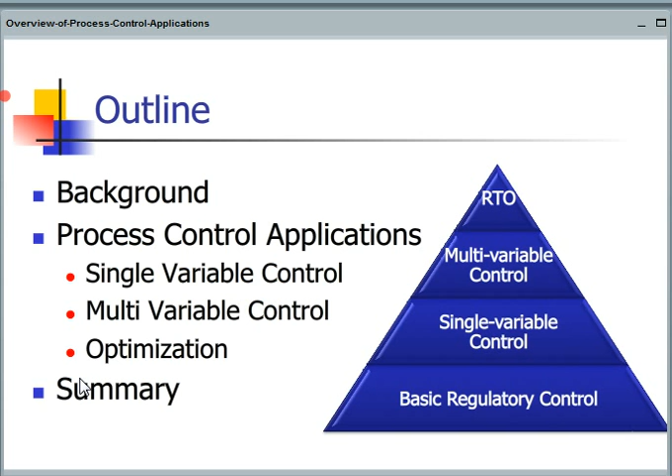We'll move on to the next one. So are you ready for some advanced process control? It appears that the job of a process control engineer will be very cool - you're working with applications all the time, and you can watch football on the side, as the cartoon shows. But it's also really a very critical job in the plant. You have to concentrate because any mistake you make can be dangerous and critical to the safe operation of the unit.

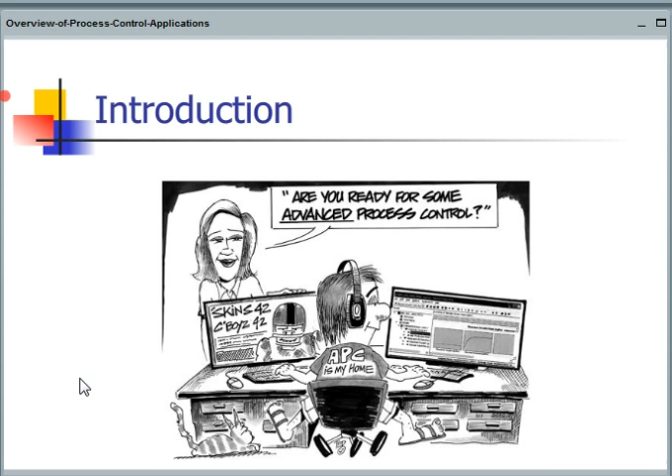So we'll just go into a little bit of background on how process control applications started. In the 1950s it was all manual control, meaning somebody would look at the sensors and see the reading, then manually change the valve, as shown in this cartoon here. You see the man in the cartoon is smiling, but that's not usually the case - it's a very hot and difficult place to work, and operators don't appreciate having to go out and manually move the valves. Imagine there are hundreds, if not thousands, of process control loops out there, and if for every loop there's an operator that needs to be looking at it, that's not very safe.

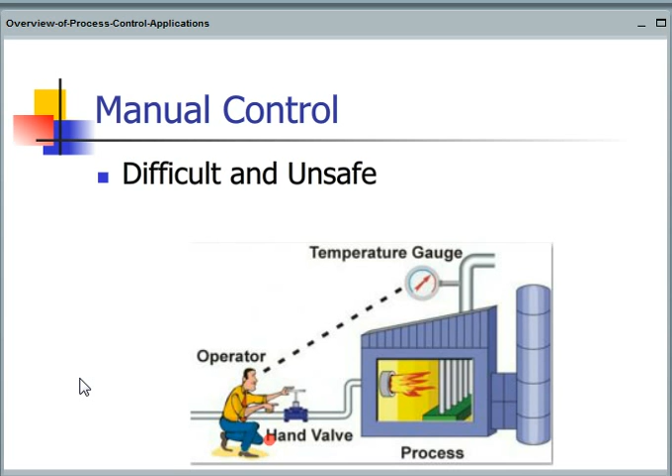So manual control typically led to the development of more automated control schemes. Over time, we can see the number of fatal injuries and how they have trended over the last couple of decades. This graph was put forth by OSHA, which stands for Occupational Safety and Health Administration, and it put in place regulations and controls to reduce workplace injuries. Over time, the number of fatal injuries has gone down considerably. Now, for each fatal injury, there are many more minor injuries that happen inside a plant. So you can see that due to the regulations and controls that have been put in place, the number of injuries has gone down over the years. That's the value of process control to an operational unit.

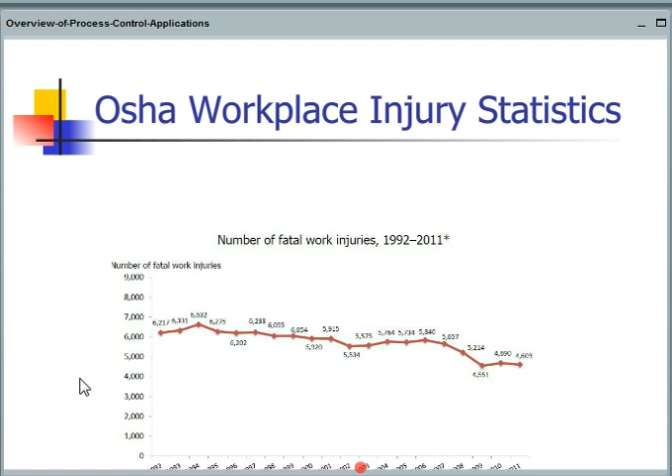So how did the transition from manual control to automatic control happen over the years? There were many developments, and one of the primary ones was in the field of instrumentation, where instruments were able to make readings accurately as well as send them to the distributed control network for the auto controls. The other important development was the control element, which is usually a valve. The change was from a manually controlled valve to a pneumatic, automatic, or motor-driven control valve. Here in the picture below, I'm showing a pneumatic control valve - it uses air pressure to move a diaphragm that controls the opening of the valve.

What this allowed us to do is remotely control the flow through different units as well as implement more complex control schemes. So we have a controller, we will talk about it a little more. User interface, how operators view the controller, is very important. If they don't really understand, then the controller is not very useful. And so are the work processes, meaning when operators use a particular control scheme, when they turn it off, and there are guidelines for them to

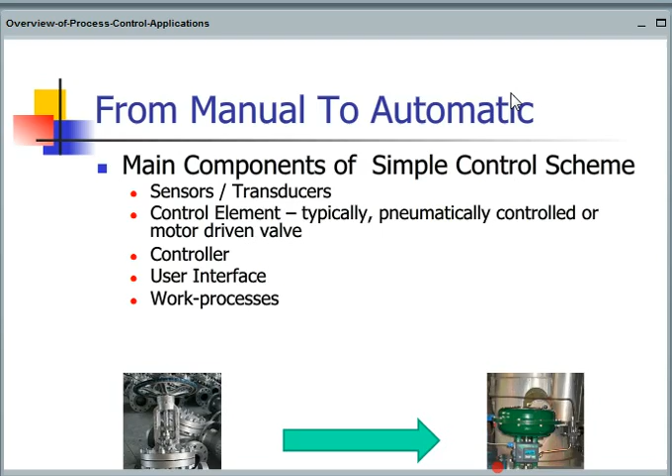properly use a controller, and that's what is very critical for the operation or success of a control scheme. So what are the key considerations you have to take into account building a control scheme? First of all, as we talked about, safety. Safe operation is critical, you want to build a control which is safe. Nowadays, people are very conscious about environmental emissions from refineries and chemical plants too, and you want to make sure you meet

all the set controls or the limits for the emissions. So you want a controller that is easy to operate for the operators. If it's very tedious, they're likely not to use it, so you want a very easy to operate controller. Sometimes the controllers are designed to meet the product specs, and they can also be used for improving the profitability of a unit.

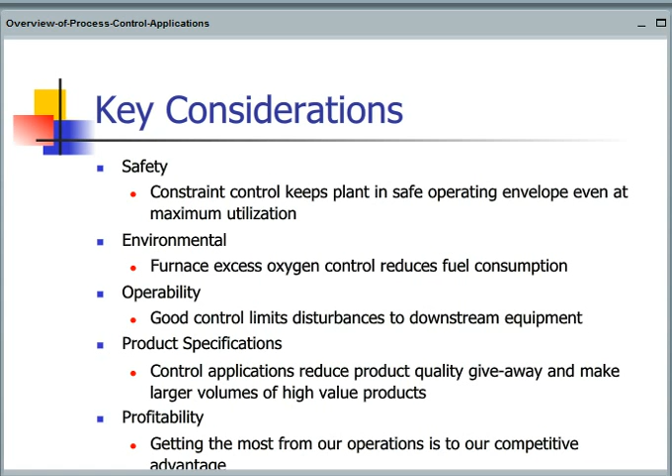We'll talk about single variable control. But before I go into single variable control, there's a layer beneath that: the basic regulatory controls. These are out in the field, close to the process, and are usually temperature, pressure, or flow control loops. When you set a set point for a flow control, this basic controller achieves the set point and keeps the flow at the value you want. These basic control loops are the base of the pyramid. If the instrumentation in a refinery is not good and the basic controllers are not working properly, all bets are off. All other

success of any other advanced control scheme depends on how well these basic controllers perform, so it's very essential to have good instrumentation. From my experience in the chemical industry, many refineries were built long ago, in the 1950s or 60s, and don't have proper instrumentation. As a result, it's very difficult to implement advanced control schemes with poor instrumentation. So the first thing when we go into a project is to tell the refineries about the instrumentation issues. Once you fix the instrumentation issues and have basic regulatory controllers working properly, now you can do a little bit of advanced stuff, which includes single variable control.

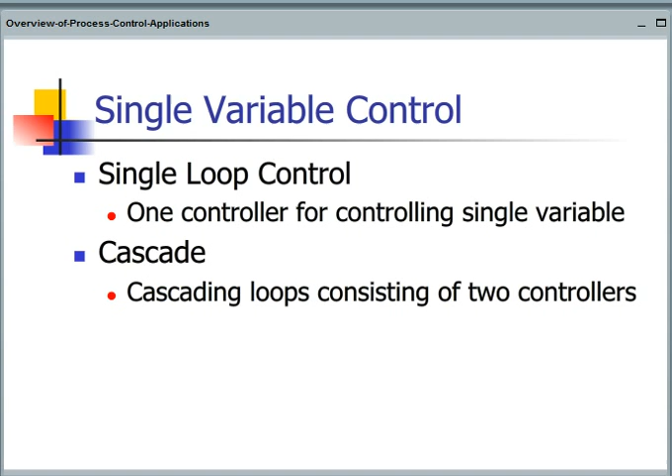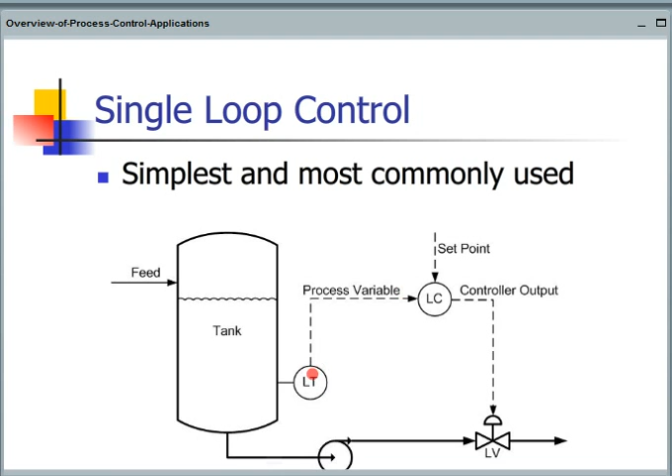To give a representation of a single control loop, here we're trying to control the level of a tank using the bottom valve. All the controller is doing is getting the level from the sensor and then setting a set point for the valve. Very simple control scheme. It looks like it needs instrumentation to provide this set point, and also the level sensor, as well as the controller design.

There are many applications of single loop control, and one of the primary applications you'll see a lot in a refining or chemical plant is surge tank control, or level control in general. What's the importance of a feed surge tank level control? It's the level of the tank that feeds the unit.

If this controller doesn't work properly, the feed to the unit starts swinging and you never have stable operations. The operators get mad at you if they find the controller is not working and causing them more headaches in operation. Tower bottoms level control is critical because if the bottom level goes high, it leads to flooding.

If it goes too low, then the trays are getting drier. Either situation is not very good. So if the instrumentation or the level reading goes out of the operator's view for some instrumentation or wiring reason, an operator needs to go out and check what the actual level is, and tell the operator on the board to make the necessary corrections to control it, because it's one of the critical levels in the unit. Sometimes when the level goes out for an extended time, it may lead to a shutdown of the entire unit.

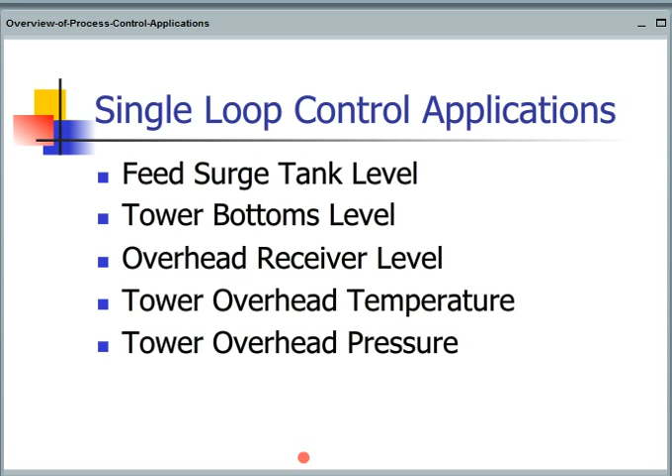Tower overhead temperature controllers are usually used for determining the efficiency of the distillation. Essentially, what you do using this temperature is set the cut point for the overhead stream, and it's again critical to meeting the product specs. And so is the tower overhead pressure control.

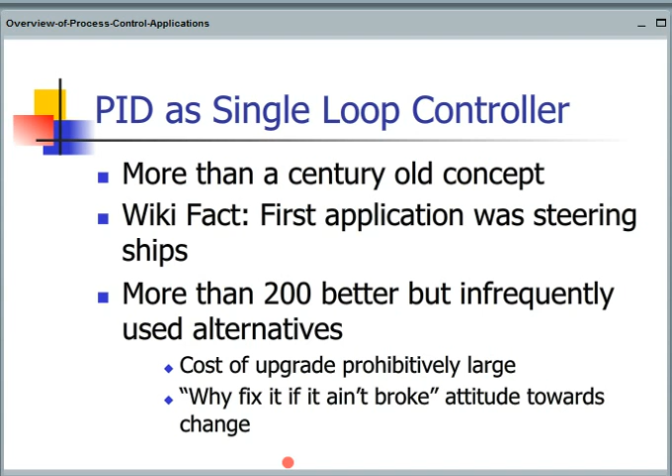Cascade control loop has two controllers, and there are actually two loops, the primary and the secondary loop.

The reason we use the cascade structure is that we do not want the disturbances in the secondary loop to affect the control variable in the primary loop.

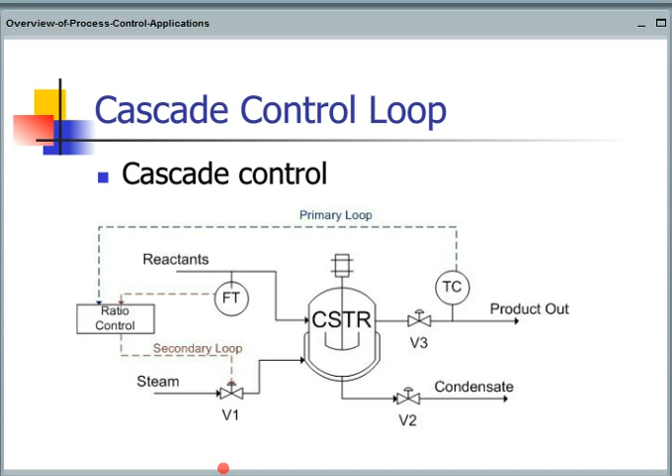Now, where this is useful in the chemical industry is for furnace control, especially in the refining industry. A furnace is like a gas stove, but only about 1,000 times bigger.

It uses fuel gas to heat up the process fluids that pass through it, and it's a tall structure. You can identify a furnace from a distance usually.

The main objective here is to maintain proper rate of heat energy to the charge. You set the...

...temperature, coil outlet temperature for the process fluid, and you change the fuel gas that's been provided to achieve that temperature. So it's a kind of cascade control loop that we use.

One of the other main objectives is to maintain proper air to fuel ratio. If the air to fuel ratio goes low and you have a lot of fuel gas in your furnace, then it's a dangerous situation.

Your furnace starts shaking. This situation is called flooding, and the entire furnace has become a bomb which has fuel gas in it.

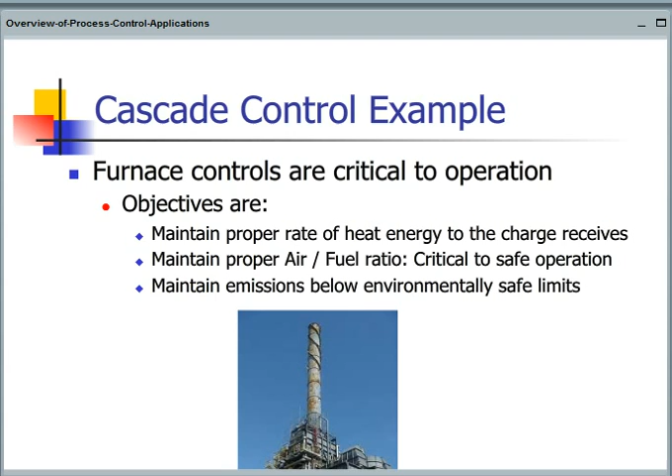There are some very well-known limitations of the basic controllers. One of the main limitations is that if you want to do multi-loop control for controlling many variables at the same time, you would have issues with the complex structures that you build.

So implementing those complex structures will be very difficult because the instrumentation or the DCS system may not support it.

It is also well known that the interactions between two or more controllers can quickly cause a drop in efficiency of the control scheme. As we have learned in our undergraduate course, if there are two or more controllers...

...and if the relative gain is high, then it's very difficult to control those two loops independently.

Basic controllers do not do a real good job if there are time delays or non-linearities in the system.

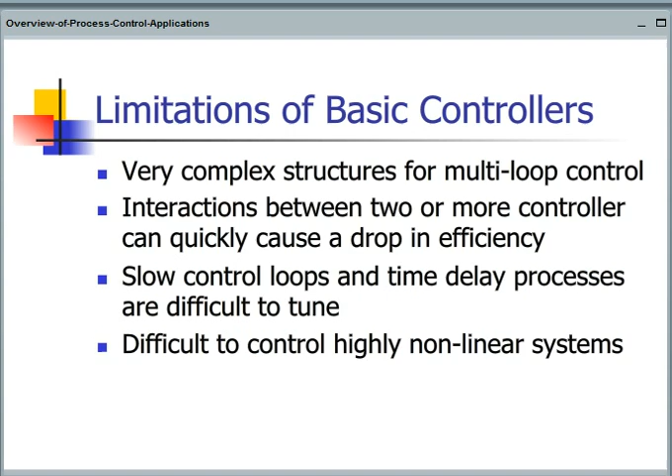So they have many important applications, but we need something else beyond that. And that's what the multivariable controllers address. These multivariable controllers are typically built for systems with more than two MVs, by MVs I mean the manipulated variables, and two CVs, the control variables.

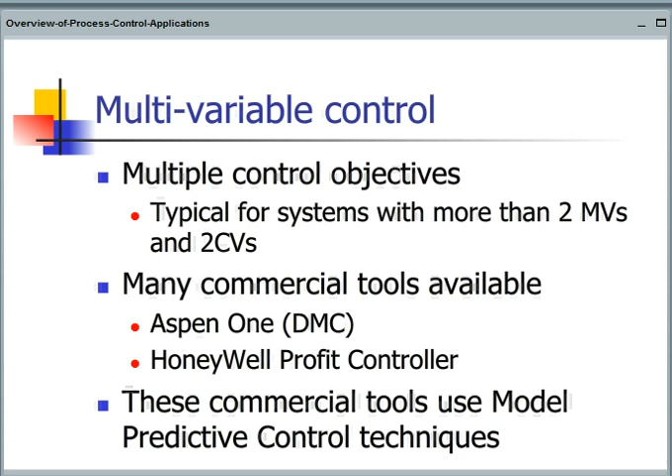There are many commercial tools available in the market to do this. A couple of the tools that I have used in my work are Aspen One DMC and Honeywell Profit Controllers. And both these tools use the model predictive control techniques, which are now pretty well known in the control community.

What is model predictive control? Model predictive control, as the name suggests, uses the model to see how the process will behave in future, and essentially the model becomes the eyes of this controller, and because it can see in the future, it can make smarter decisions. Usually these controllers are implemented remotely on a server, which can do the advanced computations that it requires at a very fast rate.

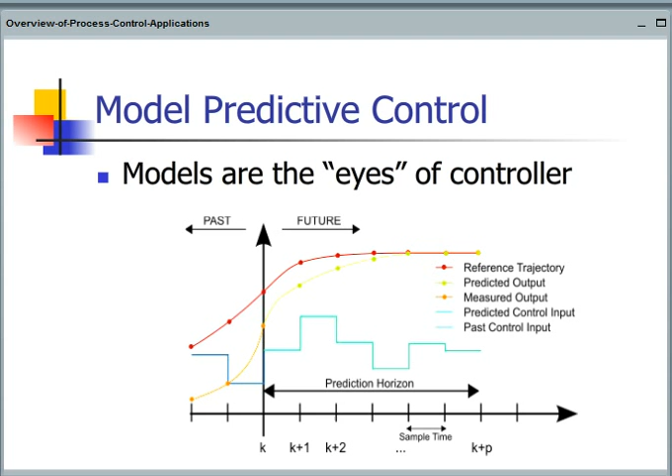We'll talk a little bit about the dynamic matrix control. I have used this frequently in my work, and it's one of the mature model predictive control technologies out there. It was started by Charles Cutler. If you work in the field of process control, you will hear this name sooner or later. He started DMC Corp in 1984. He's one of the well-known experts in the field.

Actually, the idea to build a DMC controller came to him much before. He was working on a project in Shell Oil Company in the 1960s and 70s to optimize a fluid catalytic cracking unit. And he realized that for the targets of his optimizer, he needs a controller that can accept the targets and implement them at the unit level. So he essentially needed a multivariable controller to implement the optimization targets, and that was how the DMC idea got started.

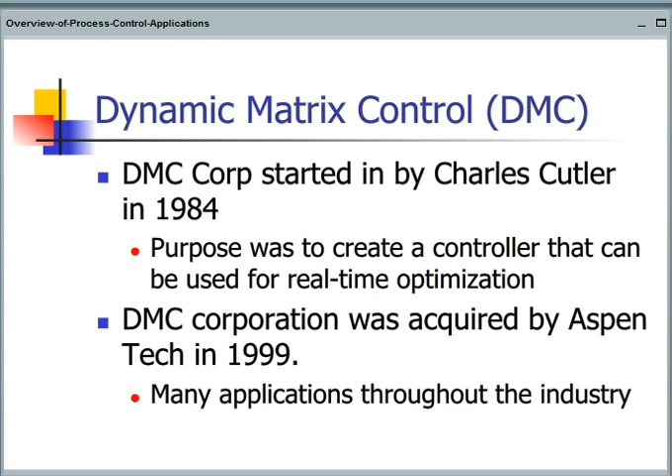DMC Corporation was acquired by AspenTech in 1999, and it was one of the major acquisitions for AspenTech. And now this Aspen One DMC product is being used by many companies worldwide. So this controller has multiple inputs and multiple outputs, as we talked about. It's a bit complex to build. It can take a few months to a year to build a DMC controller for a unit.

But the advantage is it can handle a variety of constraints, can be process constraints or anything that you want your unit to be constrained by due to safety or environmental reasons. You can put those constraints in the DMC controller, and it usually does a good job of handling those.

There are large applications out there, especially in the chemical field, which can handle more than 25 MVs. So it can move 25 valves out in the field for you, and it can handle over 100 constraints. So you can see it's a pretty big application compared to your simple regulatory controllers. And typically you would have one application per unit. You do not want too many because the operators usually won't like having to babysit too many applications.

And one of the things that's critical to its success is the feedback from the operators. If the operators don't like it, the DMC application will be turned off very soon. So one of the key things in the success of a DMC controller is to get the operators involved right from the design stage all the way to the implementation stage. That way they are always in, they can get their inputs included in the design, and they're comfortable to use it afterwards as well.

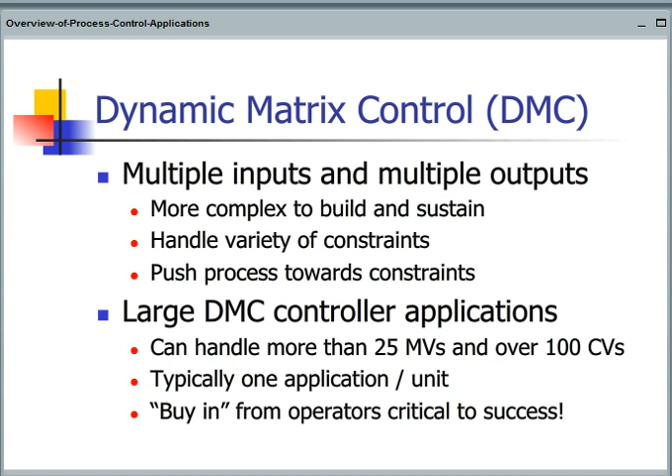There are a few limitations of DMC. One of the main ones is it's suitable for linear processes. We learn about linear processes in our control class. They are very simple, straight processes. The change in output trends linearly with the change in input. But there are some processes out there which are highly nonlinear, especially in chemicals, olefins, reactors. Those are pretty nonlinear processes.

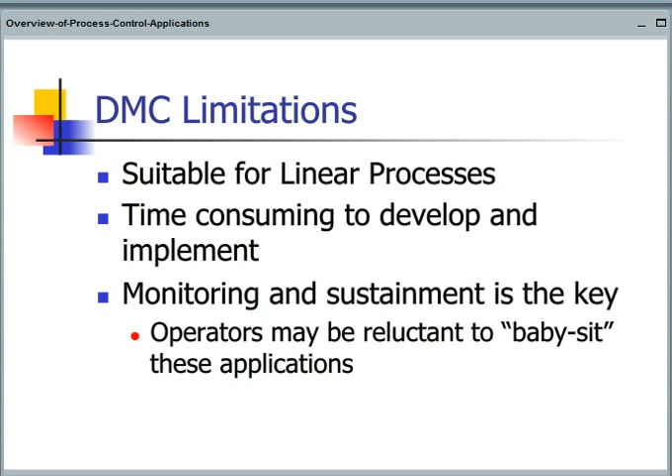It's also time consuming, as I mentioned. It can take about 6 months to a year to develop a DMC controller. The monitoring and sustainment is really the key to the success. There are several applications out there, but many turned off because there's not a proper monitoring and sustainment strategy to keep these applications running. So that's one of the key hurdles in the success of these DMC applications.

Then I'll move on a little bit to my thesis, which was control of complex processes. So we talked that DMC cannot handle nonlinear processes very well. So what to do? That's when my advisor proposed that we do something for the complex process. And by complex processes, I mean highly nonlinear, multivariable processes. There are multiple inputs and outputs for these processes, and we focus on one area, which is reactive extrusion.

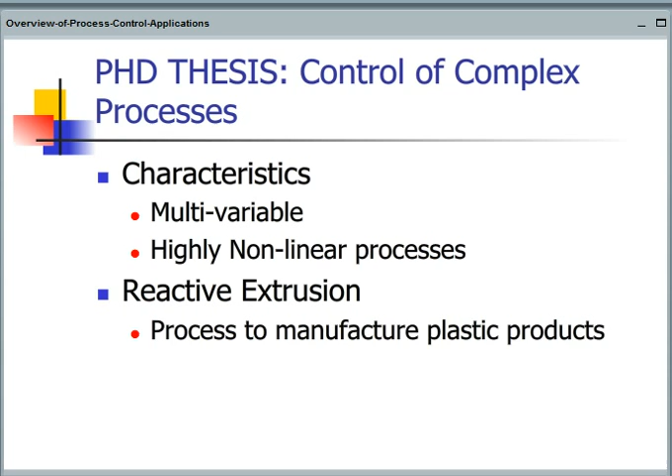This is similar to reactive distillation, but just in the field of polymers, where you use the reaction to tailor the properties of a product being extruded. And what's extrusion? Extrusion is equipment. Here I show a twin screw extruder.

So you have a hopper where you can put a polymer, initiator, different kinds of reactants that you want, and then they go in, they melt and react with each other as the screws rotate, and then you get the extrudate at the end. Many applications in the field, reactive compounding and blending, can be used for nylon as well as nanocomposites.

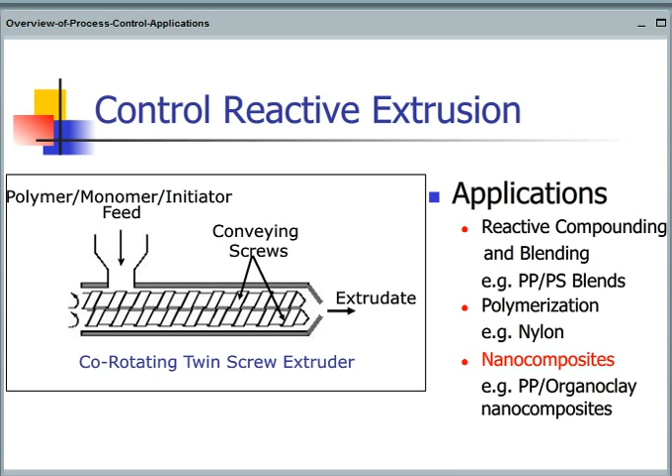For controlling this process, we came up with a little complicated scheme. We had three controllers really, and what you can see here is an inference model. This was the fundamental model, reactive extrusion process, highly nonlinear model, which allowed us to predict the effect of the different process variables on the product properties and make appropriate decisions based on that.

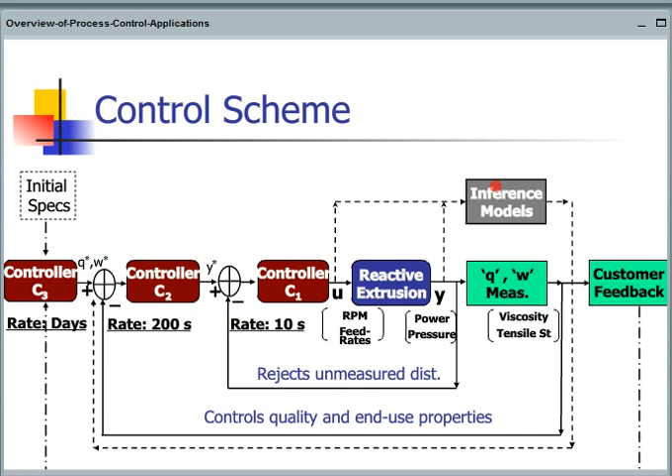So there was a customer feedback controller. So when the product goes to the customer and the customer gives us feedback, if he's happy or not happy with the product, how do we incorporate that feedback into a control scheme? And that's where the customer feedback controller comes into play.

So what we did was we developed this scheme, and we implemented it on a pilot plant process, which was at a chemical company named DuPont, and we used MATLAB as well as a LabVIEW interface to implement the scheme. Essentially, it was a pretty successful pilot process that we developed.

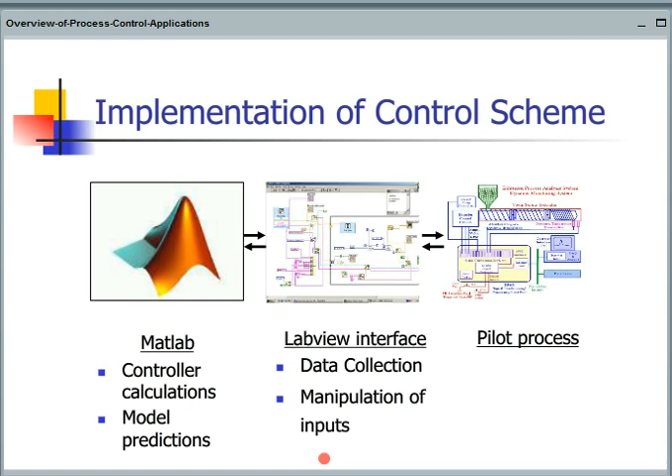But in general, these complex control schemes do have a limited number of applications in the industry, and one of the main reasons is the high development cost. I mean, it took me 5 years to develop this control scheme for the reactive extrusion process. It may not take that long in industry, but it's still a high development cost. Also, the technology is not fully mature yet.

Research is still being done on how to best implement this on more complicated processes, how to build those non-linear models so that the controller is effectively using them, and so on. So more research is needed before we can say that yes, these complex control schemes have arrived and are used more frequently in the chemical industry.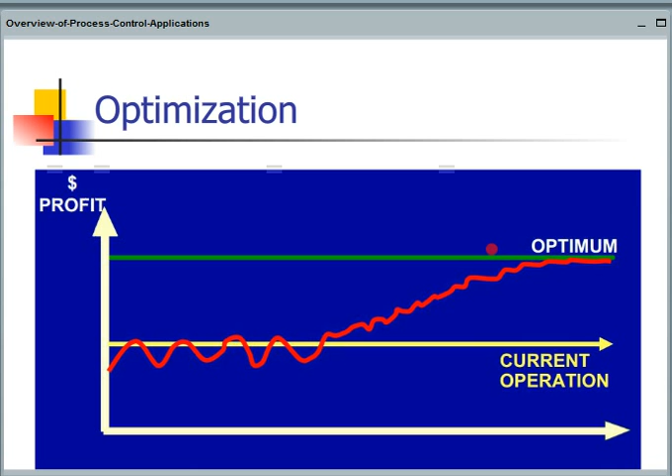I think I missed a slide here. Let's see. Oh, missed a slide here. Oh yeah, there you go. Okay, so,

usually there are fundamental models of the distillation columns, reactors. I think the one I'm showing here has distillation, heat exchangers, and so on. So essentially, for all the important units and equipment that are there, you have to use a fundamental model, and then use the combined model to optimize. Typically there are 100,000 equations in an RTO, and you need really good solvers that can solve this big optimization problem.

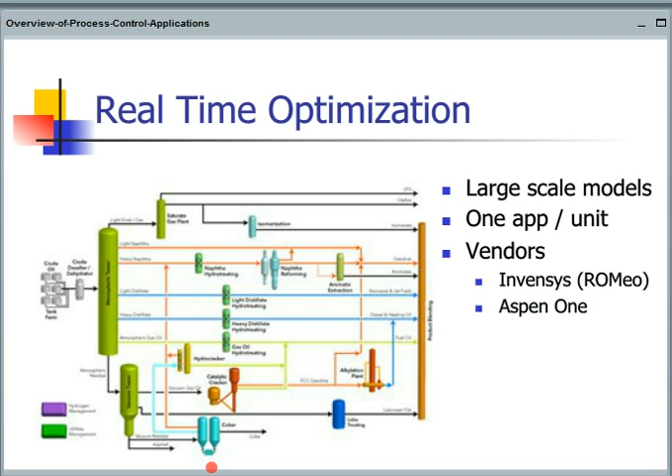Usually, you will have one application per unit. There are many vendors. Some of the important ones are ROMeo from Invensys, and there's the Aspen One product that can do it for you. So you can build your applications on these platforms. These applications, if they're built properly, can make millions of dollars for a refining unit, so they can provide real value to the refinery, and that's why they are being developed more and more nowadays.

However, there are many challenges. You have to ensure that your RTO is doing what the economics group is expecting it to do. If it's out of line with their expectations, then usually your RTO will get turned off. You need a reliable DMC underneath it and the regulatory controllers. So being at the top of the pyramid, it really relies on the underlying control layers to be effective.

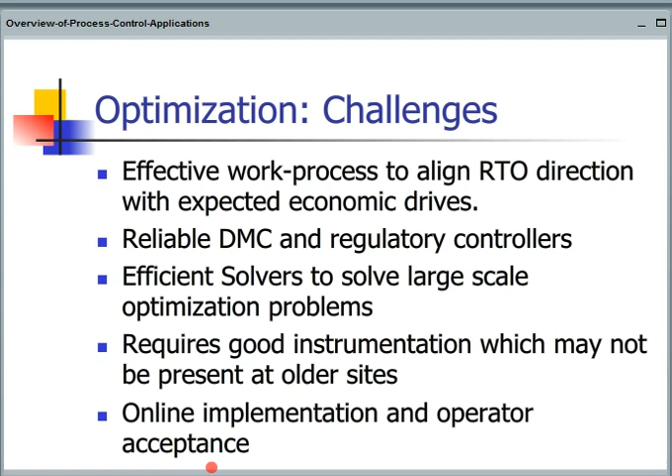As I mentioned, it needs efficient solvers since there are 100,000 equations that it needs to solve, and do it in real time. So you need good hardware to support that functionality. Also good instrumentation as well as operator acceptance. If operators don't like it, usually the RTO would be turned off and DMC. So when you build it, you have to ensure that operators understand what it's doing and how it's doing it. Otherwise, it gets turned off pretty soon.

One final slide is on integrated process control and safety system. Process control, as I mentioned, is a key part of running a plant in a safe manner, and it becomes a part of the safety systems for the plant. So you have different layers here, as you can see. The process control usually keeps the process within the operating limits for the plant, for the unit, and if it goes beyond that, then there's alarms as well as emergency shutdown systems. These are pretty standard nowadays, and there are systems like Triconex systems which can do this for you.

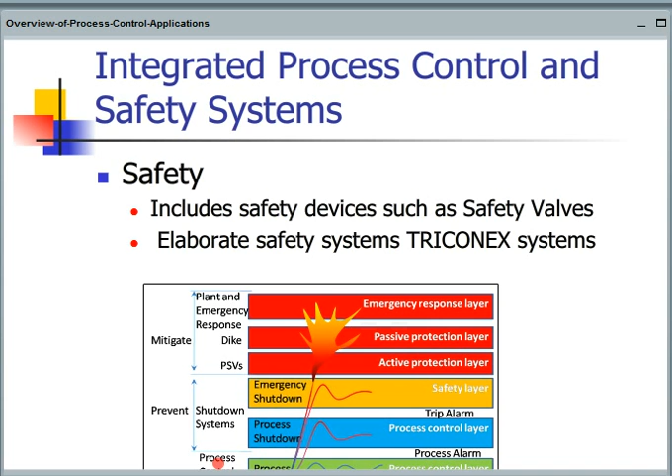Alright, so how is the life of a process control engineer? I'm just changing a gear before summarizing. As the cartoon says, you have to do a lot of things being a process control engineer, and you have to handle many different applications that are out there. And it can be a pretty challenging job. And if you're interested in something like this, you can definitely bring value to a chemical industry or a refining plant.

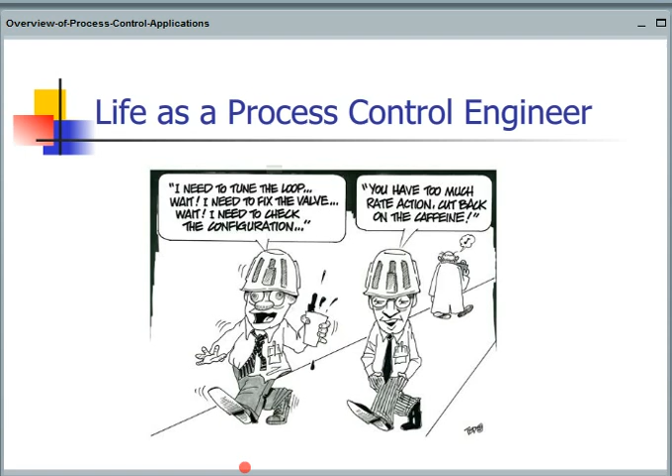To summarize, process control schemes, as we talked about, are critical to the operation of units. The success of any process control scheme depends on basic regulatory controllers. Still, the most common regulatory control used is the PID controller that we learn in our undergraduate class. The knowledge that we get in our undergraduate is still valid and useful.

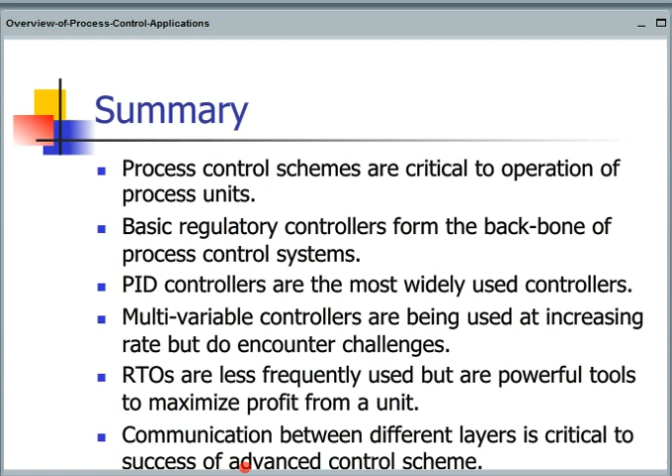Multivariable controllers are used at an increasing rate. They do encounter challenges, and so do RTOs, which can bring a lot of value to the unit. As we talked about, the communication between the different layers of the advanced control pyramid is critical to the success of this thing. So with that, I'd like to take any questions that you may have from your side.